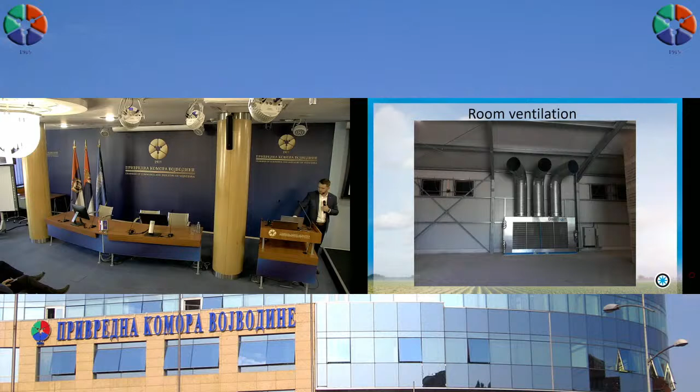I will tell you in a few words the basic working principles of a few systems: room ventilation system, suction system, blowing system, bulk, letterbox. But I will not do that as a presentation. I would like to show you what I have, how I work. And I hope it's okay to use these microphones, it will be easier for me. Do you hear? Okay. We will start from the room ventilation system, I think, because

maybe a short question. How many of you are growers here? How many of you grow vegetables? Please raise your hand. How many of you grow potatoes? Okay. So if I'm right, every farmer here is growing potatoes. So that should be our number one priority with this seminar. Who grows onions? Also quite a lot of people. What other crops do you grow in a bigger volume? Potatoes and onions? Somebody carrots also. Okay.

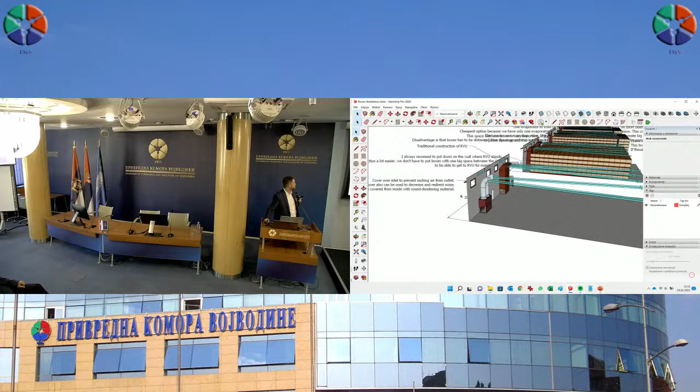But why am I asking? Because we will talk about room ventilation systems, and I will do that on 3D models. The main principle of how it works is that we take the air from the outside with, well, we call them room ventilation units, but they are called dragons, chimneys, whatever, doesn't matter. There's an inlet hatch in the back of it, and outlet hatches on the top.

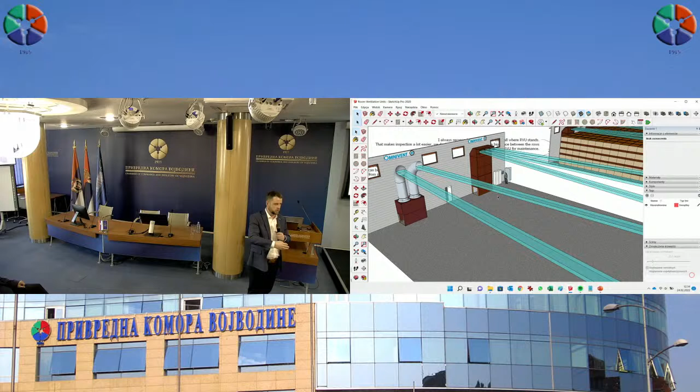And sometimes it's not appreciated enough: for this system to work, the outlet hatches have to be on the back wall. They just have to be. If anyone is telling you that the system will work if the hatches are on any other wall, it is a lie.

It will not work. I've seen storages with room ventilation units where the hatches were on a sidewall, for example. It will not work, never. And because this ventilation is also sometimes called gravitational. Yes, it works like this: we blow the fresh air above the boxes. It has to go all the way and go back through the boxes.

And also, in many cases, the clients do not appreciate the way the boxes are stacked. Last time I was in Croatia, we had many talks about this, and I think I opened the eyes of many people, that it is extremely important how the boxes are stacked in this kind of storage. Because have a look, most people think that it's most important for the air to go back between the boxes. But it's not. The most important part is for the air to go through the pallet openings.

Because I will draw you something. It's very simple, but many people have no idea about this. Most of you, I know in Croatia, but probably in Serbia it's the same, have boxes 120 by 160, correct? And if we want to ventilate a potato which is in the middle, it is the furthest one for us to ventilate, to cool down, to dry when it's needed.

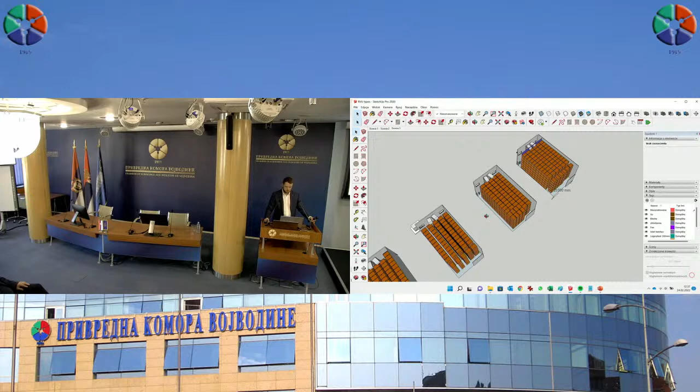Is it familiar to you? Have you seen these kinds of drawings? It's a layout of the boxes from a top view. And sometimes the competition is showing it like this: dear customer, you will be able to load X amount of boxes, and you will be able to put them like this. And it's a shot in the knee. Because what will happen here?

The air will go on the sides. It will avoid the boxes, because it will not be able to enter the pallet openings and even the spaces between the rows. You see? This is closed. You will not have ventilation there. So even if you have the best ventilation system, best cooling system, and you load the boxes like this because some Dutch guy told you to, and you have wet potatoes, for example, you will lose them. They will rot because you've put the boxes like this.

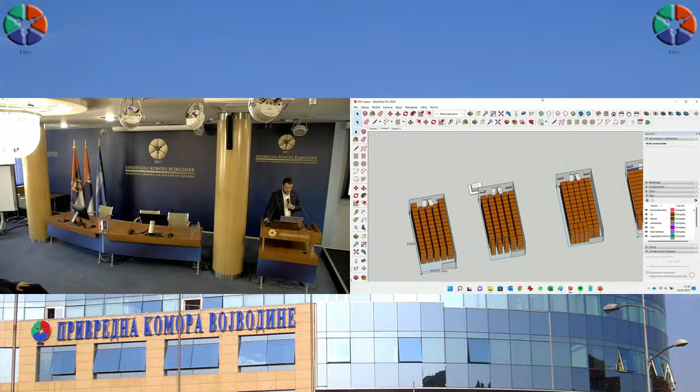And I will show you a few more. For example, this is also, in my opinion, a common mistake: to stack the boxes like this, where you have the ventilation unit and the boxes are behind it. I'm not saying that it doesn't work. It will work, but we can do it better, and it's all about the quality. It's all about running hours.

Because the system will take the air mainly from the rows in front of it. So we will have a temperature difference. You will also have a humidity difference between the rows. And the bigger the cell is, the bigger your problems are. So that's not the perfect way to do it.

A lot better way, of course you lose 2 columns, yes, you lose 2 columns, but a lot better way is to do it like this. Then, if you have a gate here, you are able to load a few columns of boxes like this. But please always remember to leave the space, because the air will drop there and will be able to go back through the pallet openings. And this way you can be almost sure that the ventilation will be good. How to do it better?

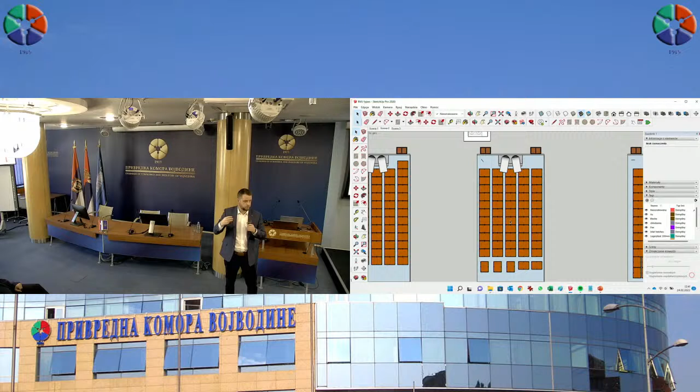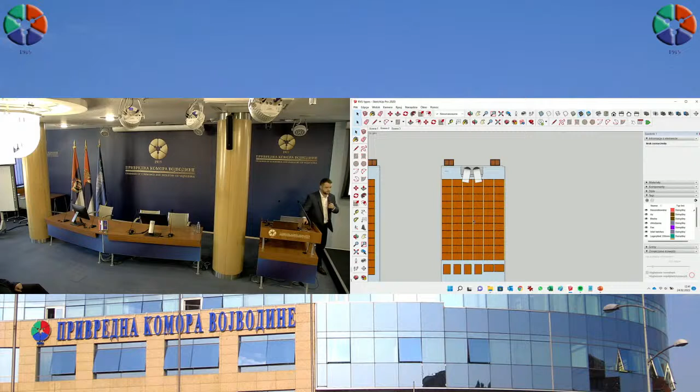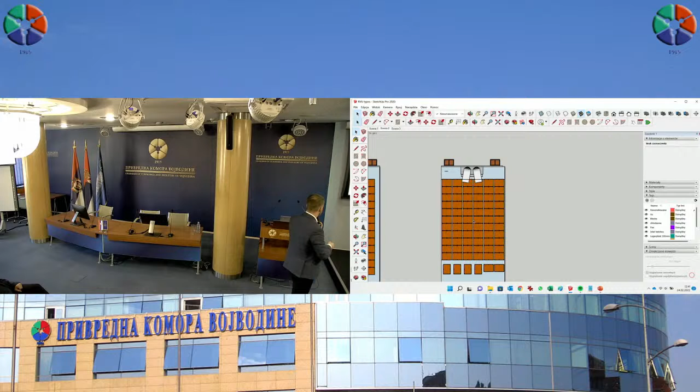Have a look. We have decreased the space between the rows. The common theory behind it is that it has to be 10% of the width of the box. Yes, if it's 160, it should be 16 centimeters. I say don't care, doesn't matter. I have clients who also put the boxes right next to each other. Right next to each other, yes? But I'm not a fan of it because of two main reasons. I will show you that on the next picture, I think.

You see? This, for example. I have clients who have storage like this, it works. But when you put the boxes right next to each other, you save space. You use your space in storage maximum, yes? But you are not able to put a sensor on the box in the middle there. You don't know what's happening. You have no idea, yes? And of course, the risk of disease spreading in this box storage is very limited by the boxes.

Yes. So, if you have some problems, for example, on the field there was an electric pole, and with your sprayer, you always had to avoid it. Or there was a downfall on the field, and the water was there for too long. You have rotten potatoes. If it goes to the storage, it is possible that some of the boxes will rot and they will float away. You know exactly what I mean. For every farmer who is growing potatoes, it happened. If not, it will happen.

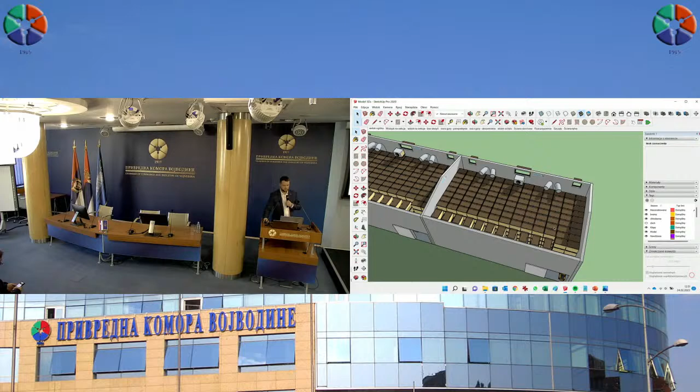I told you that the way we work is that we are helping you design, we are building the ventilation system, etc. And I told you that we are not doing the buildings. But if you are planning a next investment, in my opinion, what is the best scenario? The best scenario is that you start from the end. You choose the company which will deliver you ventilation and cooling before you choose the builder. Because then the design can be made exactly fitting to the equipment that we want to install there.

And in many cases, that's how it's going. I meet with the client and he's saying, hey, I want to build a storage for 6,000 tons. And then we are talking. Okay, what varieties? When do you harvest? What temperatures, etc. And in 90% of the offers, I attach a kind of drawing like this. And when the customer is agreeing, okay, I go with Omnivent, then this is what we are giving to the construction company and to the architect.

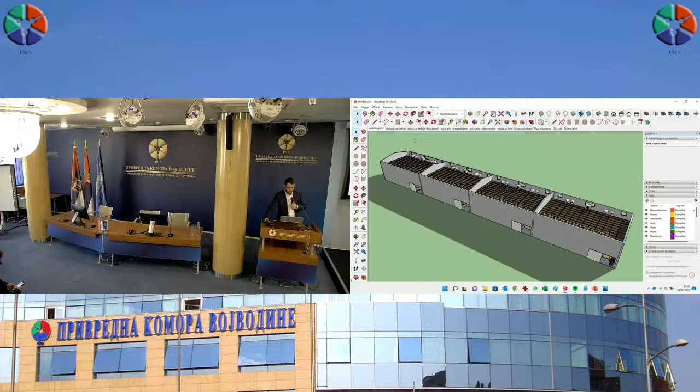And in fact, 90% of the job is done, and that's what happened, for example, here. We agreed with the client how it looks, what he needs. Also you see the layout of the boxes, with everything I said, and with all the openings, with all the dimensions. Everything. Let's say the starting point. Of course, it's not architectural design, but for a starting point, that's everything the architect needs. It was, let's say, job done. So it makes the life of us all a lot easier.

Okay, since almost none of you has this kind of system, I think I will go further. Or do you have any questions about the room ventilation unit systems? Okay. I will go on then, and I will focus on the suction system. Does any of you store in bulk? Yes? Okay. Let's go for the suction system then.

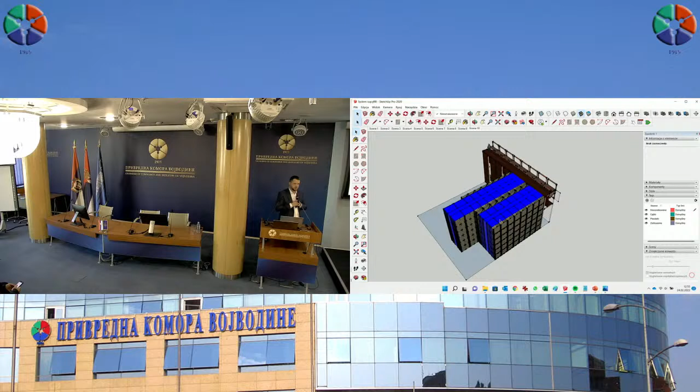I will show you also other drawings, but this is a drawing which I use to explain how the system works, because it is very important for everyone to understand how it works first. Sometimes clients, even with this kind of system, don't know exactly how it works, and it will never be successful if he doesn't know the principles.

It works like this: we have a pressure wall, where beneath the fans, we are sucking the air from there, creating under pressure in this part of the pressure wall. This part is connected with vertical openings, and so the air is sucked through those vertical openings.

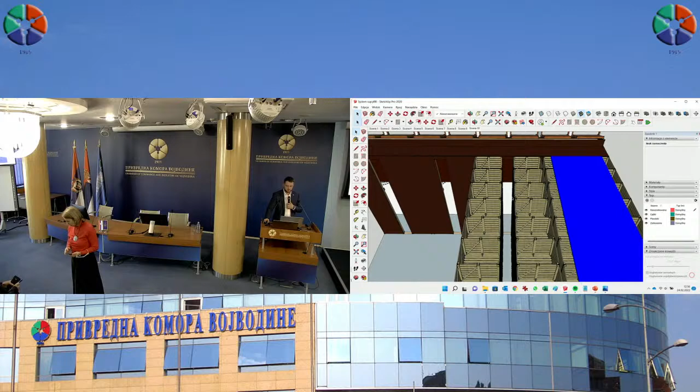Then, on two sides of the suction opening, we set up rows of boxes. The row between the boxes is part of the ventilation system, you have to be aware of that. It is, in fact, a duct, where we suck the air from, and then we cover it with a suction cover. It's a very simple thing, but it really makes it work, makes a huge difference.

So then the air, which is sucked from the space between the two rows of boxes, has to go somewhere, and it goes through the boxes, through the product. And here is also a small hint.

It is also a common mistake that for the suction system, clients use boxes where the boards are on the same level. Why is it a problem, and why is it something that we should avoid? Please look.

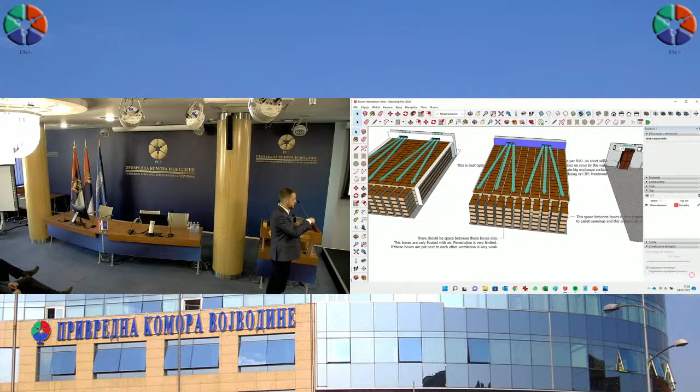As far as I heard from you, this system is not well known in this area, and I think that product, that system, should be the most interesting for you. Why? Because it's a very good system when it comes to the price compared to the capacity of the storage. In fact, it's the cheapest. And it's not the best solution for onions, for example - it's not a good choice, because there's no active ventilation. With things like onions or garlic, we need to be able to really fast dry the product. But with potatoes, especially table potatoes, this is the first system you should look at.

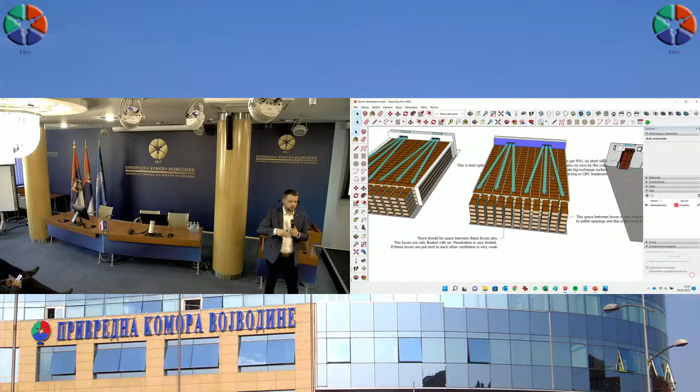In a moment I was talking about the suction system, and how the box is designed - we will get to that later also. But with the suction system, the quality of the box is extremely important. It has to be squared, and all the gaps have to be in the right places. So it means the box is very expensive nowadays. I've been in this business for many years, but it has never happened that wood prices doubled, and that's what's happening right now.

So the boxes for the suction system, or the letterbox system, or the blowing system, which we will also talk about, have to be good quality. If it has to work correctly, it has to be good quality. With the room ventilation system, it really doesn't have to be. The most important thing is that the boxes have to be equal in dimensions, so you will be able to stack them more or less in this layout. Maybe I will be able to show you an example.

Have a look, here we have a box - it's a suction system. We create under-pressure between two rows of boxes, and our aim is to suck the air through the openings on the short side. Here the client also has the typical layout. But in most cases, when you bought the boxes, it went like this: a truck came with a pallet, two long sides, and loose planks - loose boards. A team came and nailed the boards by hand, without a square. So it happens that there is no square angle here.

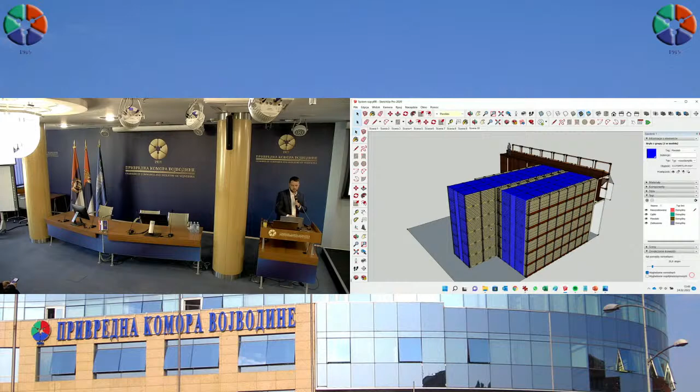For those of you who have those tarpaulins, the suction covers, do you have the mechanism to wind them, roll them automatically, or do you do it by hand? By hand, mainly? It is most common nowadays that we are selling automatic rollers, because it's a heavy thing. It's high, so it's dangerous, in fact. So most of the cells that we are doing right now have an automatic suction cover winding system.

And it is a great thing because you can roll on or roll off the suction covers in seconds, without going up, without risking your life or the life of your people. You can see it's a very simple thing. You have a rolling machine operated by the switch box close to the gate, and you roll it down. The only thing you need to do when it's on the floor, you just grab it to get to the boxes, and in fact, the job is done. That's it.

So then it looks like this when it's at the top. You see? Practice. This is practice. These were the first days that the client was using the system. My team finished the job, and I came to the training, and he was already loading. And he was not aware of how big problems he was causing himself.

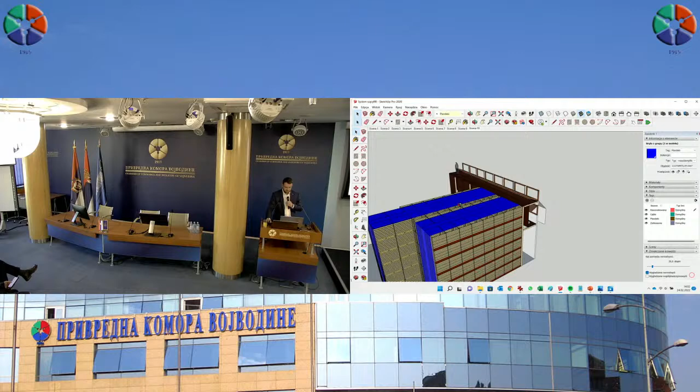If it is a very wide cell, then it can make a difference. It should not be on the side wall. It should be on the back wall, or the front. But in most of the cases, that doesn't make any difference. But to come back to this drawing, you see that here we create under pressure, like I said.

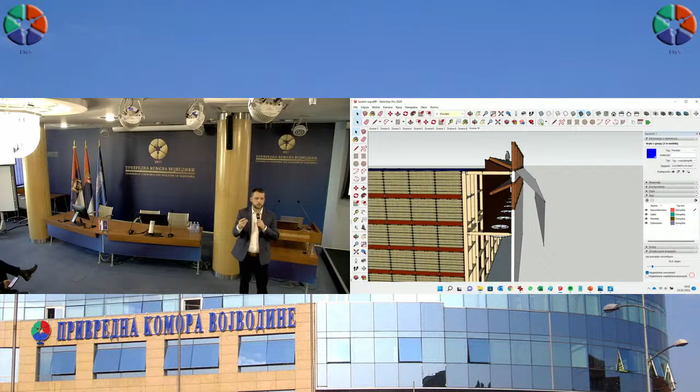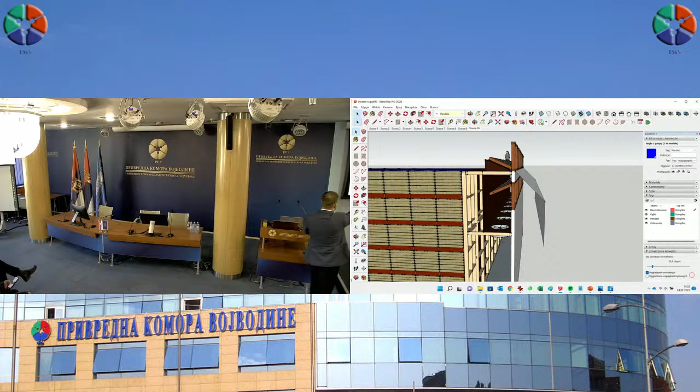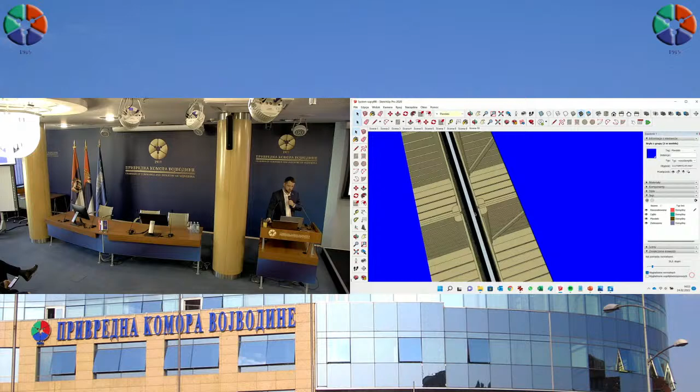The fans are blowing the air up, and these are outlet hatches. The air goes out through this one. So we create under pressure in the whole cell. So naturally, when the inlet hatches are open, the air goes in. It goes above the boxes, drops between the rows, and then goes through the box and through the product. And all over again.

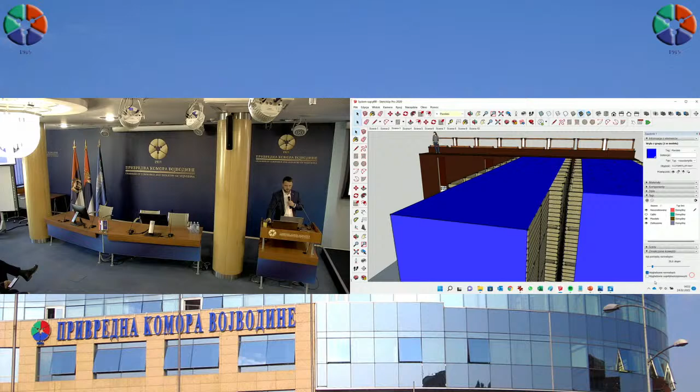When the temperature outside is not suitable for ventilation, the hatches are closed. The circulation of the air is the same, and then we put evaporators. And the best position is here. I've seen on the Agronom website that it's on the side. I wonder if you see the difference in the product with Delta.

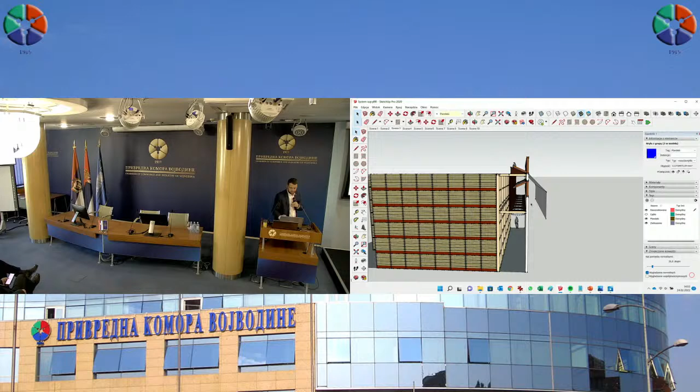Because, I don't know how big your cells are, but the perfect position for the coolers is this. You see? There's a pressure wall. The air goes to the top, and evaporators are in the natural stream of the air. So we do not fight with it, we do not mix it, we do not make any turbulence. We just use the natural airflow. And then the air is blown on the evaporators, so we even increase the capacity of the fans.

And then it goes further, drops between the boxes, goes through the boxes, and goes again to the pressure wall, and again, and again. So, we were talking about humidification, how important it is. And this is the best option available on the market. It's not rocket science, everyone has it. Everyone calls it in a different way, but this is evaporative humidification.

It works like this: here on the sides, there are pads. This one we call Omnibreeze. It's 30 centimeters thick, and it has a structure like honeycomb. So it has a huge surface. And the air going through that structure takes the moisture, because it's constantly moist with water dripping on it. We have a small pump which throws the water on top of it, and the water goes down. And we suck the air through it.

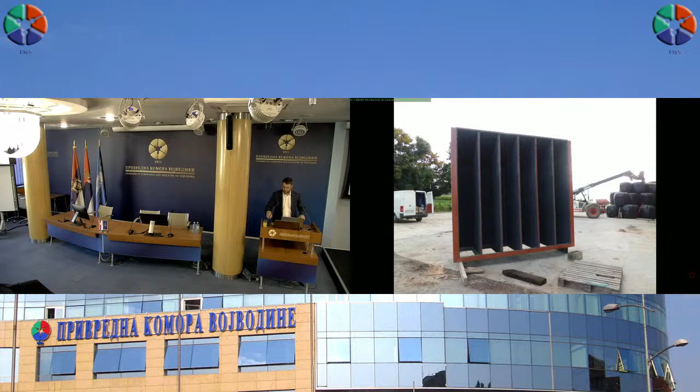And the other thing which we can do, and it also makes a huge difference, is to install this kind of thing on the hatches. You see that we put this kind of cover on the hatch, and it has additional layers inside, and it is covered with a foam like it is used in acoustic studios. So it's absorbing a huge amount of noise. Really, it's unbelievable how the level of the noise can be decreased.

But we installed this kind of cover. It's also wooden, so it's also absorbing the vibrations, because if it would be a metal sheet, it would also vibrate and carry the noise. And you can see here, you have additional layers, and they are all covered with that foam. Job done, no problem. So that's how we deal with it.